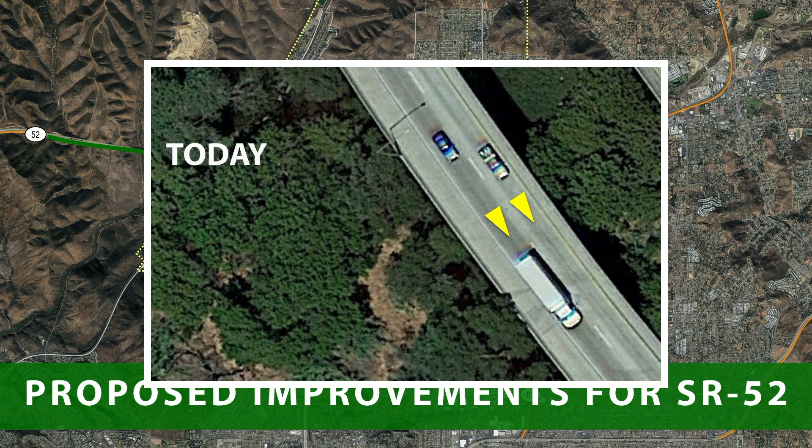Now let's look at the other direction, eastbound 52. By adding an additional lane on the San Diego River Bridge, we remove the funnel where 3 lanes go down to 2. Here's how the bridge looks today, just past the merge point. You see only 2 lanes, highlighted with 2 arrows. And here it is with a 3rd lane, shown in green, removing the funnel and clearing the slowdown.

That extra lane on the bridge keeps cars moving freely all the way to State Route 125. Both of these improvements, west and east on the 52, will help relieve congestion. Mast Blvd traffic will improve with the increased capacity on 52, but we want to do better.

We will upgrade the 52 on-ramp at Mast Blvd to a high-capacity on-ramp. Here it is today. There are 2 right-hand turn lanes from Mast onto the ramp, shown again with yellow arrows. These 2 lanes collapse into just 1 before joining the freeway, leaving only 3 westbound lanes on the 52.

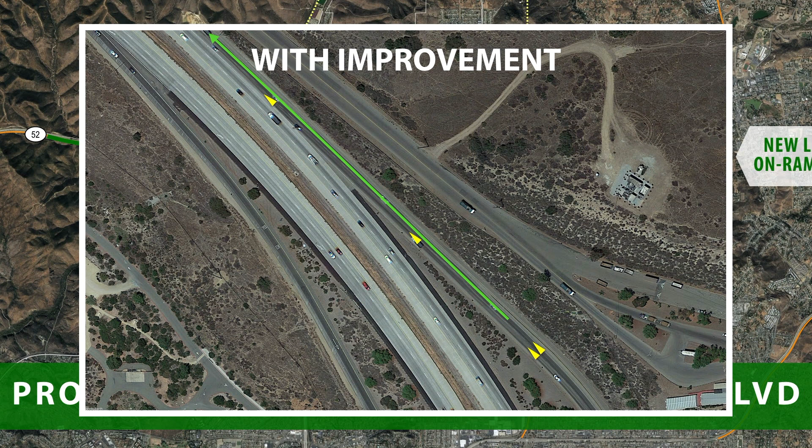By removing the merge, 2 lanes will connect with SR 52 instead of 1, making 4 total westbound lanes. Because there is no merging, and 1 additional lane shown with the green arrow, traffic will flow more freely.

To be clear, this traffic is not a Santee-focused problem. It's a 52 problem. Yet with Fanita Ranch, working closely with Caltrans to complete these improvements, we have the opportunity to make traffic better. It's important to note that the 52 improvements will have a dedicated environmental review and approval process, just like any other Caltrans project.

We have agreed to a strict standard that all the 52 upgrades must be completed before any new home at Fanita Ranch is occupied. That commitment will be memorialized in a legally binding document between the city and HomeFed. Now that we've examined the region, let's move closer to home and discuss Fanita Ranch's plans to improve Santee's city streets. As you all know, the Fanita Ranch property lies along the northern border of the city.

When Santee was incorporated in 1980, this property was included and set aside for development. It's been planned for homes for 40 years.

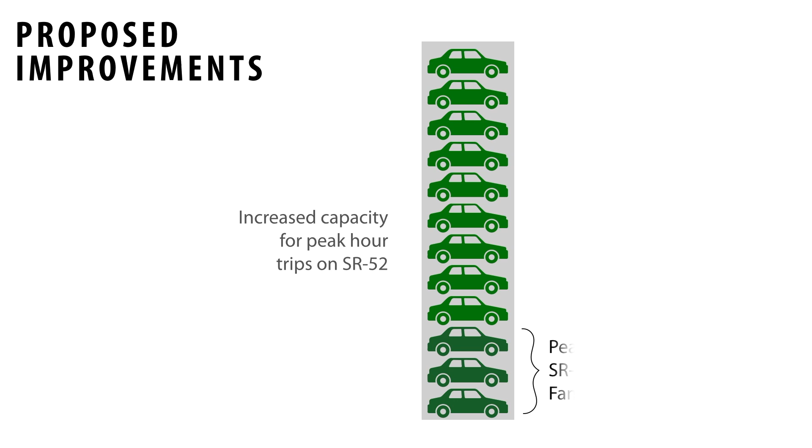Taken together, added lanes in both directions of 52 and the new high-capacity on-ramp at Mast Blvd will help traffic significantly. The stacked green cars represent the increased capacity at peak hours, and the dark green cars indicate the new capacity on SR 52 that Fanita Ranch residents will use. As you see, Fanita Ranch will use just 25%, leaving the remaining capacity to improve traffic for all of Santee. These improvements will take approximately 18 months to complete, so they could be done as early as late 2022.

Understanding the traffic challenge with the 52, we know we needed to do much more than just accommodate our project. We needed to make traffic even better than it is today. An independent economic impact study came to the same conclusion. London Moeder Advisors stated, improvements of this scale cannot be achieved without the approval of Fanita Ranch.

Working with Caltrans, we enlisted traffic engineering professionals to create simulations. They used traffic research, projections of future population growth, potential developments in the pipeline, and data from Caltrans to create conservative estimates of how traffic will change in the future. Conservative means these simulations assume a higher level of growth in traffic than is likely.

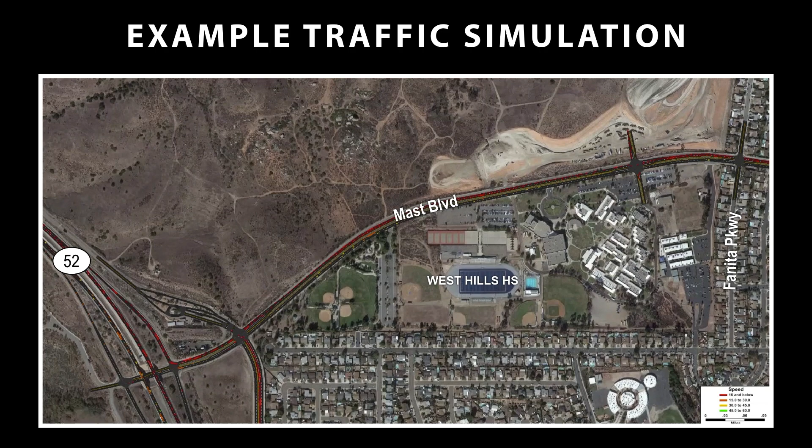Here's an example. Just like any map, this is hard to read without a key. So let's look at what the elements in this simulation mean. The traffic on the roads in this simulation is color-coded, similar to how traffic appears on Google Maps.

Green is for free-flowing traffic traveling 60 miles per hour or faster. Yellow is for traffic not as free-flowing; these cars are going between 45 and 60 miles per hour. Orange means traffic is pretty restricted, cars traveling between 30 and 45 miles per hour. And red shows that traffic is quite heavy, with cars traveling 30 miles per hour or slower.

Now that we can translate these maps, let's use them to examine traffic. We will look at traffic today, traffic in 2035 without Fanita Ranch or the improvements, and traffic in 2035 with Fanita Ranch and the traffic improvements Fanita Ranch will bring. We use 2035 because SANDAG, in coordination with local government and agencies, designates 2035 as a horizon year, a mutually agreed upon future point of reference for comparing changes in traffic, population, and other things.

The first is a simulation comparing traffic today with traffic in 2035 on westbound SR 52. Data for all these simulations came from Caltrans. Here's the freeway during the morning commute.

Notice all the red. Looks like small ants - those are cars traveling less than 30 miles per hour. The backup exists before you even get to Mast. That's due to traffic from El Cajon and other communities to the east and south, choking traffic from the 125 freeway to the 15 freeway. Today it takes about 24 minutes to go the 6 miles from Fanita Parkway to Santo Road.

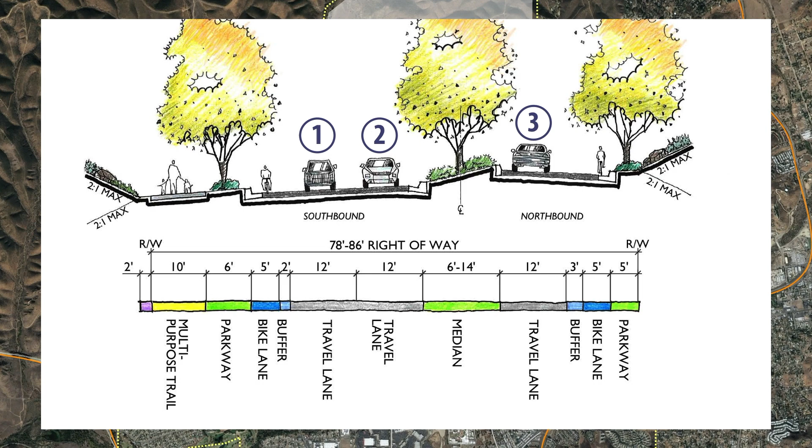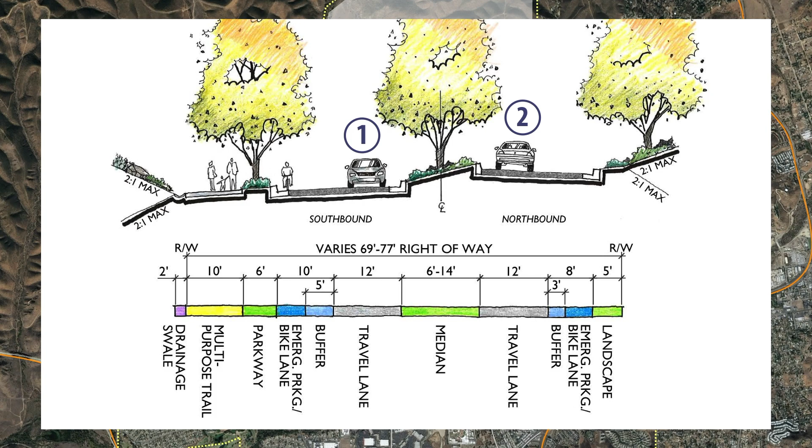This cross-section shows the continued multi-purpose trail and the 2 travel lanes. You can see there is ample room for an emergency access lane in each direction, in addition to the single lane of normal vehicle travel.

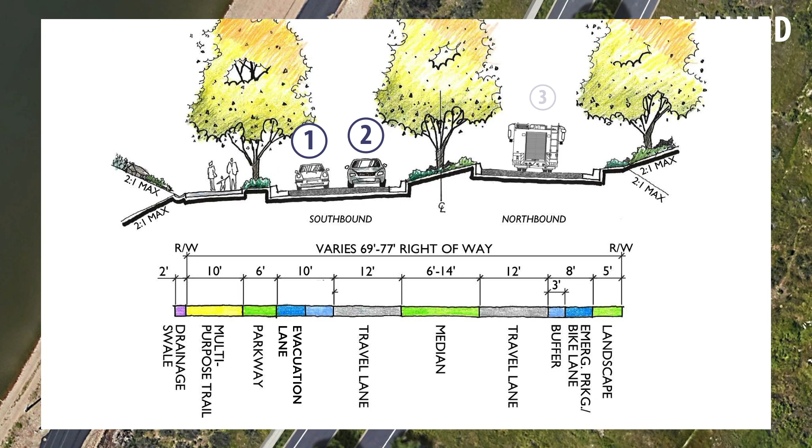We will once again zoom into a section of this road to show the improvements. Here is a look at where the road will go, and how it will look with a new median, trail, and bike lanes. During emergencies, the southbound lanes can accommodate 2 lanes, giving northbound access exclusively to emergency vehicles.

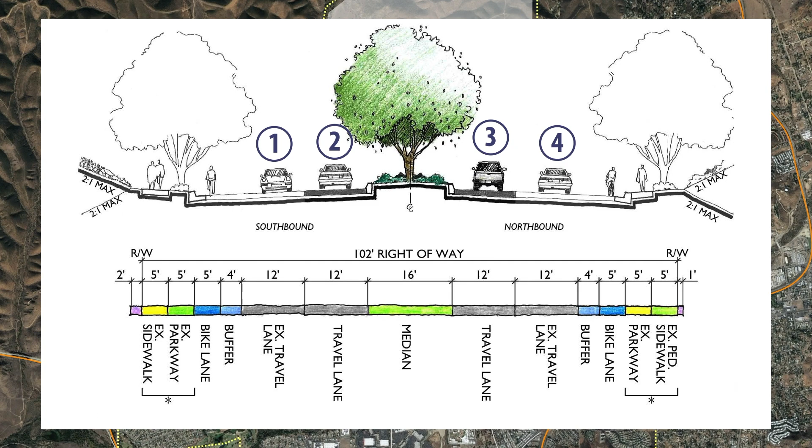Now moving to Cuyamaca Street. Today, the street is wide. From Mast to Woodglen Vista, the improved road will have 2 lanes of travel in each direction, along with the sidewalks and bike lanes it does today. The road's current footprint is wide enough today to accommodate these changes.

We'll zoom in one more time to show today and improved. Here's an overhead of Cuyamaca today, 2 lanes traveling north and 1 lane traveling south. Here are the improvements, 2 lanes in each direction with landscaping and sidewalks on each side.

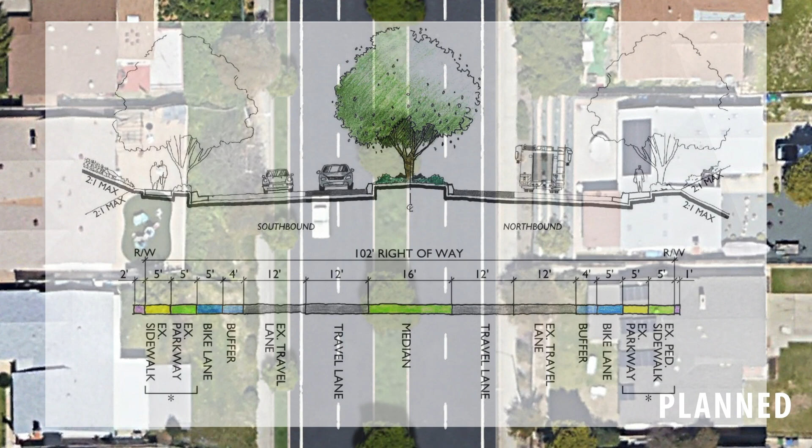The important thing to note for all these improvements is that the roadways do not move closer to existing homes. Again, looking at evacuation procedures, northbound remains open for emergency vehicles, while southbound can accommodate 2 lanes. North of Woodglen Vista into Fanita Ranch, the road will be 2 lanes, 1 in each direction, with room for 1 additional emergency access lane in each direction.

We've seen how SR 52 will change and traffic will improve, and how city streets will also be enhanced before one resident moves into Fanita Ranch. Now, let's take a look at Fanita Ranch.

I'd like to walk you through the internal circulation network within Fanita Ranch's new neighborhoods and explain our design process, which includes complete streets, transportation demand management, and traffic calming features.

It's important to keep in mind that Fanita Ranch was designed as a self-contained community, with ample amenities on site, like shopping, a school, fire station, parks, and trails, so people would need to use their cars less frequently to get what they need. Combine that with another important design goal, supporting alternative transportation. Together, a reduced need for car trips plus alternative transportation led us to a complete streets design.

Complete streets are designed to safely accommodate all users, including motorists, pedestrians, bicycles, and transit riders. This is achieved by pairing bike lanes, multi-use trails, landscaping, and buffer areas with roadways throughout the community's road network.

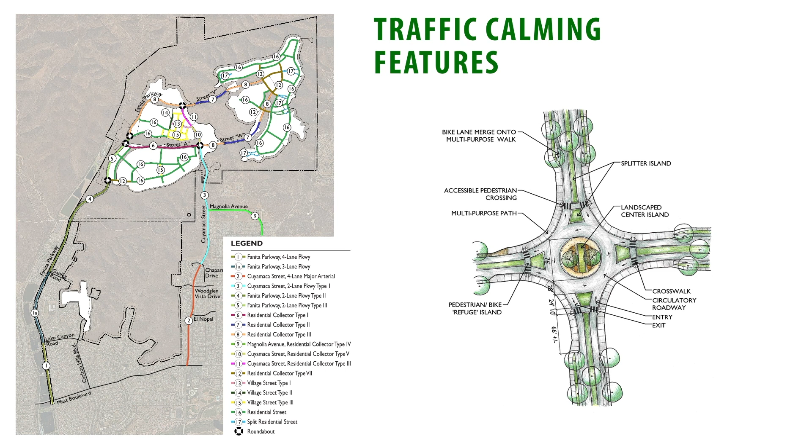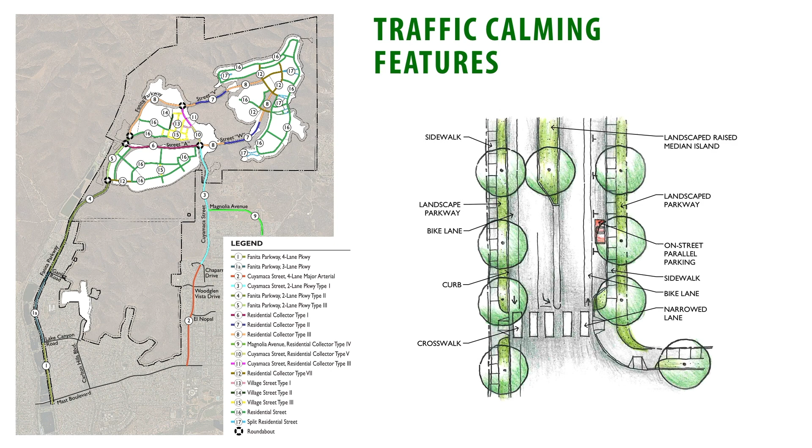Our circulation system will use traffic calming features to keep vehicle speeds low, minimize impacts of environmentally sensitive areas, and make things more beautiful. Design elements include roundabouts, split streets, landscape medians, and parkways that will be planted with native plant species. Bike lanes and mountain biking trails are threaded throughout the road network and the property, so residents can get where they want to go on just 2 wheels.

Each village is planned to include a bike station where riders have access to water and air, electric bike charging stations, and a bicycle sharing system. Nearly all neighborhoods and gathering spaces will have a bike lockup and parking areas.

We've also baked in transportation demand management to our mobility plan for Fanita Ranch. This approach incorporates an understanding of how people use infrastructure to get around and create systems to encourage alternative and more efficient modes of transportation.

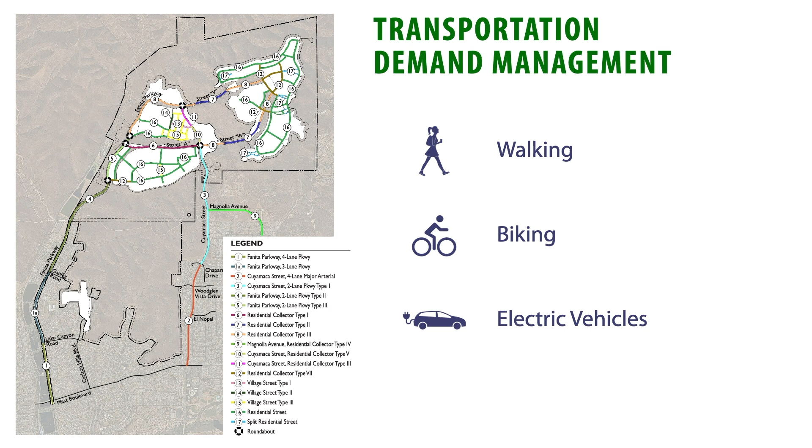While minimizing car trips is the best way to cut emissions, using electric vehicles is also a big help. Every private garage will be designed to accept an EV charger. You can see that our plan for Fanita's internal transportation network was designed to reduce car trips and emissions, promote alternative transportation, and get people moving under their own power.